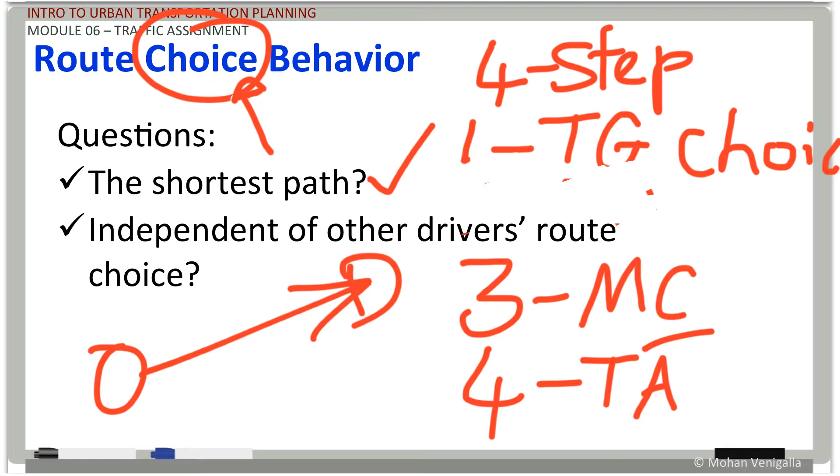So equilibrium assignment is the most used method these days in travel demand modeling software. All the methods you studied earlier were used at some point. Especially iterative assignment is still used, but not as much as even 15 years ago, thanks to advances in computing. It's not necessarily the software, it's mostly the processing speed that has increased, and therefore people can afford to adopt equilibrium assignment. We'll get to that later.

The premise of equilibrium assignment is that the network travel times, the link travel times, are going to be so adjusted by people choosing their own paths in such a way that the network will be in a state of equilibrium. What it means is that there is no incentive for people to switch their route.

Keep in mind there is a distinction between a link and a route. A route consists of a number of links. A link is one individual segment between two intersections. So a bunch of links make up a route. We are talking about switching a route, not just one link, an entire route from origin to destination. Keep that in mind. So when I use the word route in examples, treat it as something that can contain a number of links.

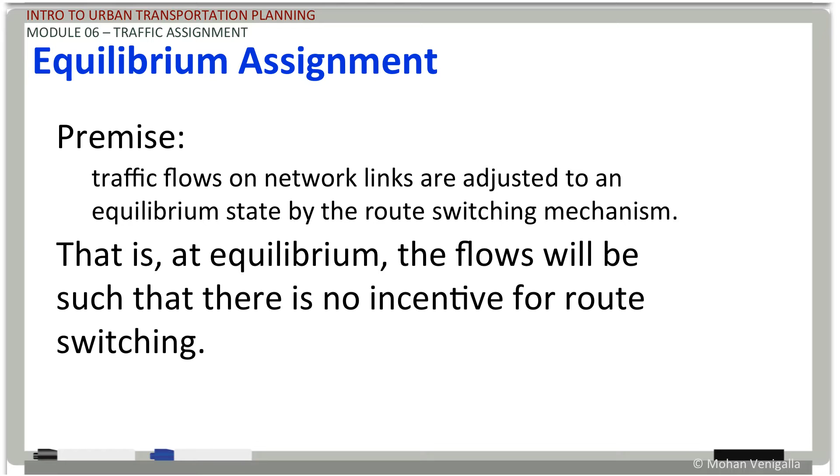So there are a couple of theories: one is user equilibrium and the other is system optimal. In user equilibrium, if there are multiple routes in play for a motorist going from origin O to destination D, let's say 3 routes, by switching from route 1 to 3 or 1 to 2, he's not going to improve the travel time. Improve is the operative word, meaning it will not be reduced. At best, it can be equal if you switch.

System optimal, on the other hand, is a formulation that seeks to minimize the total system travel time. In other words, I go from my home to George Mason and you go from your home to shopping. Regardless of purpose, our combined choices are going to affect the system such that the total travel, the number of vehicle trips times the number of miles traveled by all of us, is going to be an absolute minimum. It's a theory.

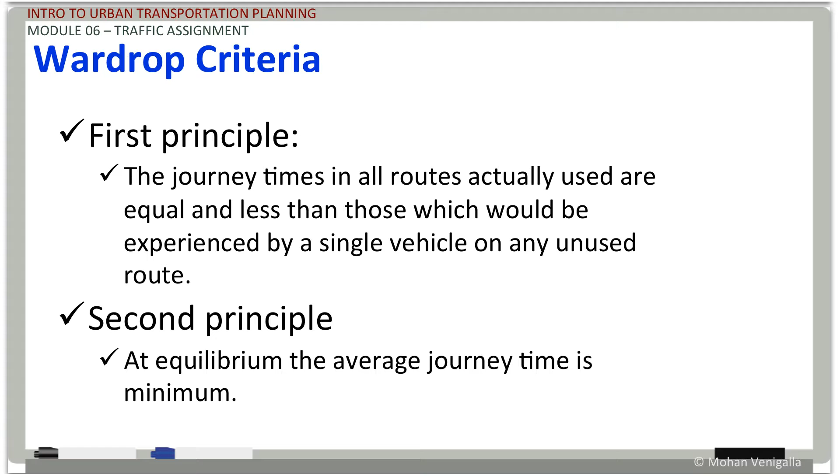That brings us to Wardrop criteria. This Wardrop criteria is very famous.

These criteria lead to the development of the user equilibrium assignment method. The first principle says that journey times in all routes...

I probably keep using that interchangeably. They actually, if they are in play, that means if they are being used, the travel time on the ones that are used is going to be equal to or less than the ones that are not being used. So the keyword is used versus unused. Keep that in mind.

The second principle states: at equilibrium, the average journey time is the minimum. So the average journey time of all travelers is minimized. These two principles form the basis for equilibrium assignment.

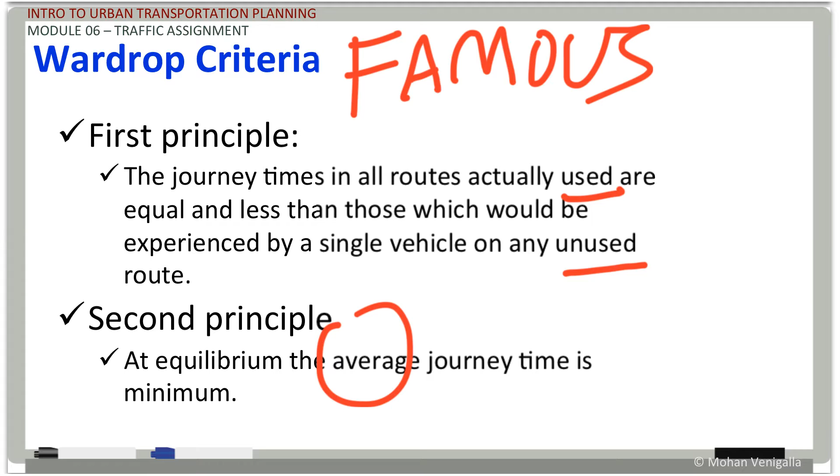As I mentioned just a little while ago, there are two methods of equilibrium assignment. First is the user equilibrium and second is the system optimal. Let's talk about user equilibrium. This is based on the Wardrop criteria, which we just talked about.

The two main assumptions in play here are: travelers are going to make travel decisions between any given OD pair entirely based on travel time. And the travelers a priori, meaning ahead of time, know exactly what is going to be the travel time between point A and point B.

Considering this method was developed decades ago, that assumption is a stretch. In today's world, you can probably envision a scenario where your travel time is chalked out because of lots of trip planning services available to you, like Waze or even Google Navigation. They give you approximate travel time. But consider this some 30 years ago - it was not possible to have prior information about travel time between any two sets of points.

So essentially this all comes down to this: if two routes are used, their travel time is going to be equal. If there are 3 routes, 2 of them are used and 1 is not used, the unused one will have either equal travel time to the ones that are used, or more.

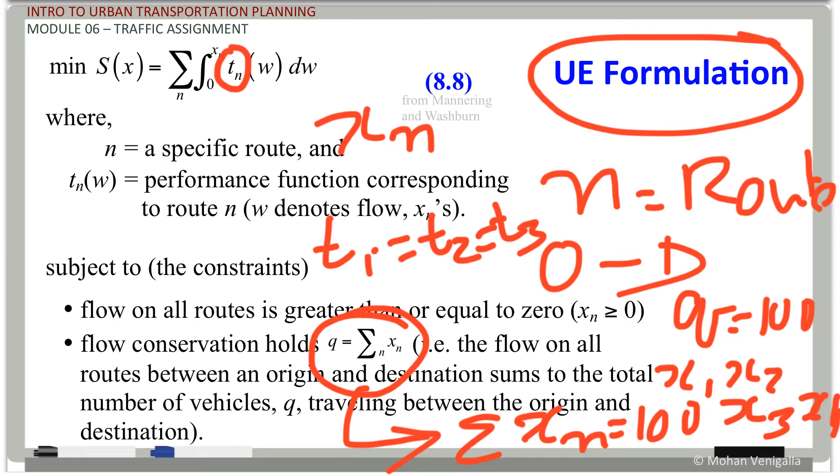In that particular state, if all 4 routes are used, the travel times t1, t2, t3, and t4 are going to be equal. That is this mathematical formulation. So if you look at - let me pause here a second.

So let's take a look at this mathematical formulation for a second. It looks very intimidating - it actually is - but when you really take a closer look at it, it's not that intimidating at all. What you have here is a travel time function. Remember what we have, the BPR function?

The BPR function is nothing but a travel time function of T sub 0 and the volume capacity ratio, right? So essentially, for each link you have a volume capacity ratio, a travel time relating to that volume capacity ratio. If you integrate between 0 volume and the maximum volume that link can take, which is what this term states...

Then you sum it all up among all the routes, across all the individual link segments in the route - all the links that are used in any route. There are several different ways of putting it. Then you have this, subject to the condition that the total flow between O and D is going to be equal to the total number of trips - if it is 100, then sigma of all the routes that are used is going to be 100.

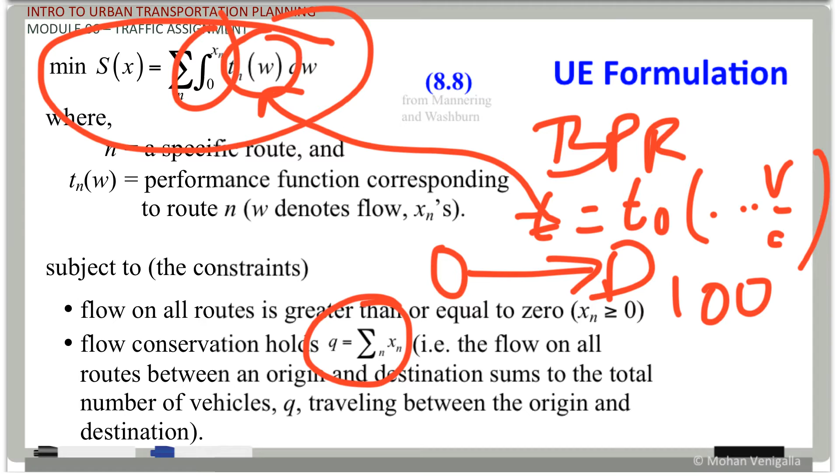So let's take a look at this formulation in the context of a 2-link network. You have your O and your D, and route 1, route 2, or link 1, link 2. Sometimes I may use these interchangeably, but route is the best way to keep in mind. A route may consist of a set of links.

If your travel time function for route 1 is T, whatever is in play at any given time, you have the volume, and this is going to be your T. So that is the function given. If you integrate it from 0 volume to V1, you are integrating between these two, getting this area.

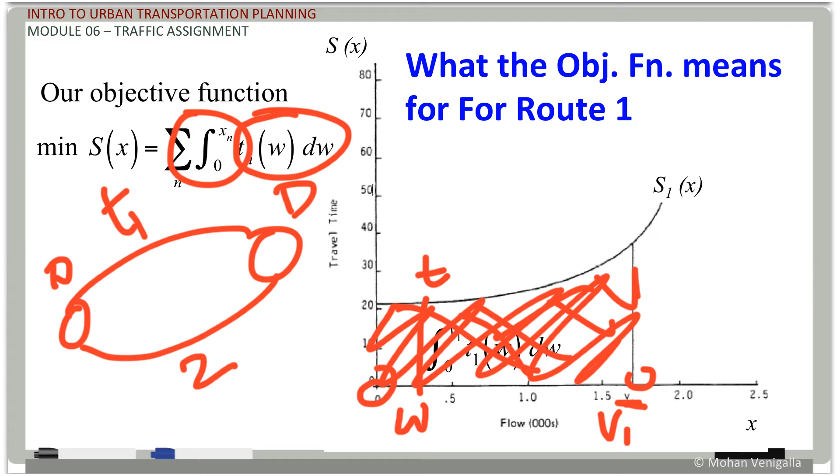That's what this formulation is talking about. You'll have a similar thing for link 2, and when you add them all up, that sum is going to be minimized in this mathematical notation.

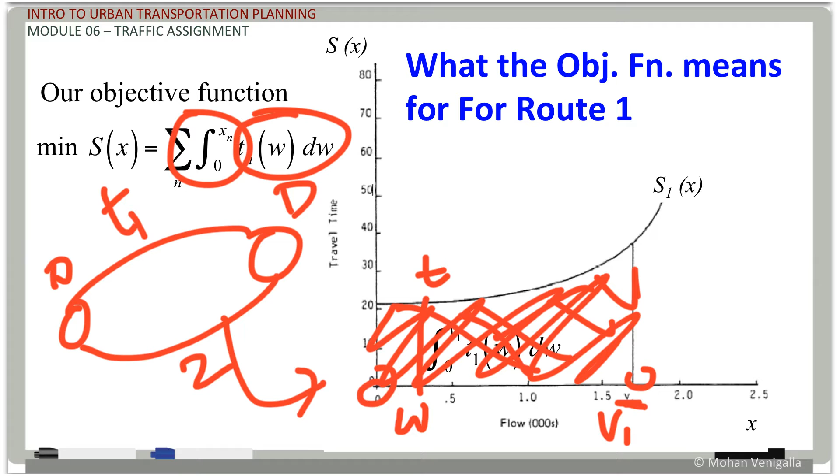So the best way to illustrate is to talk about a problem. Here is a problem taken from Mannering and Washburn, in your CEIE 360 book, chapter 8 — forgot the actual problem number. This problem states it's a two route network, route 1 and route 2. You have two routes, 4500 vehicles going from point A to point B, from origin to destination.

Route 1 has 60 miles per hour speed and is 6 miles long. Route 2 has a speed of 45 miles per hour and is 3 miles long. On route 1, for every 500 vehicles added, the travel time is increased by 2 minutes. On route 2, the travel time is increased by the square of the number of vehicles. We are required to find the equilibrium travel times.

So pause it here and read the problem again, and it will be much clearer when we are solving it if you understand the problem first. First and foremost, we need to find out what the travel time function is — this is basically the link performance function. It is verbalized to us, but we need to put it in mathematical notation.

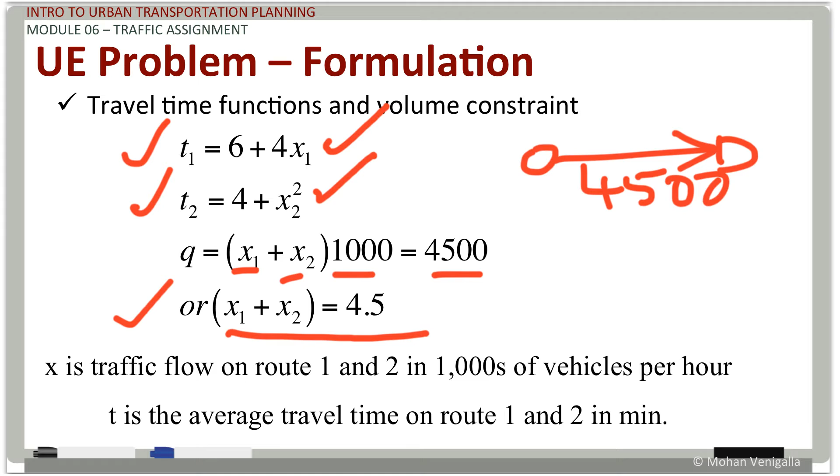First and foremost, we want to find out: will both routes be used or not? Well, you can clearly say they will be used. Just an intuition tells you that they will be used, but there is a mechanism to find out.

What if we put all 4,500 vehicles on one route and calculate the travel time? Let's put x1 equals 4,500 and x2 is 0. If x1 is the only one used, route 1 is the only one used, and route 2's travel time has to be higher than or equal to route 1's.

If you substitute like that, T1 will be 6 plus 4 times 4.5, so approximately 24. That's T1. In this case, while x2 is 0, T2 will be 4. So T2 is... T1 is greater than T2.

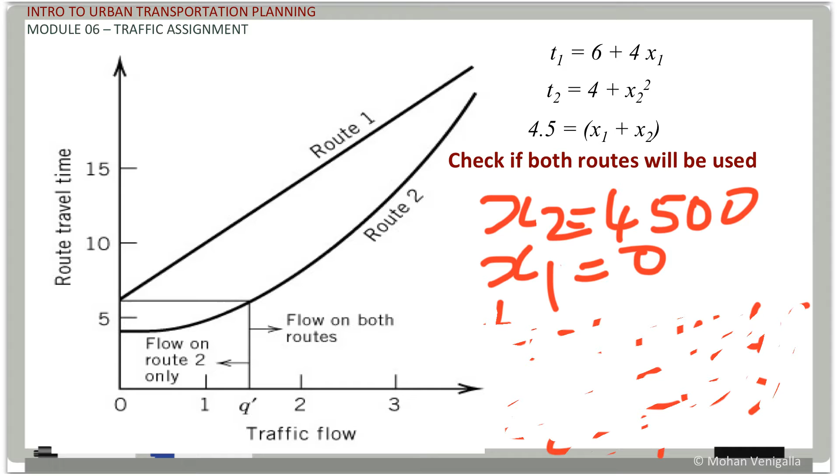Another way to check it is to put x2 as 4,500 and x1 as 0, and then solve this for T1 and T2 - you will get a similar answer. So there is no question, both routes are being used, and therefore the system has to be in equilibrium.

We have to solve for it. For a two-link problem like this, the simplest solution is a graphical solution. So what I did here is I put it in a spreadsheet. I put volume on x1, route 1 volume only, and then I computed the travel time on route 2 and travel time on route 1 based on x1.

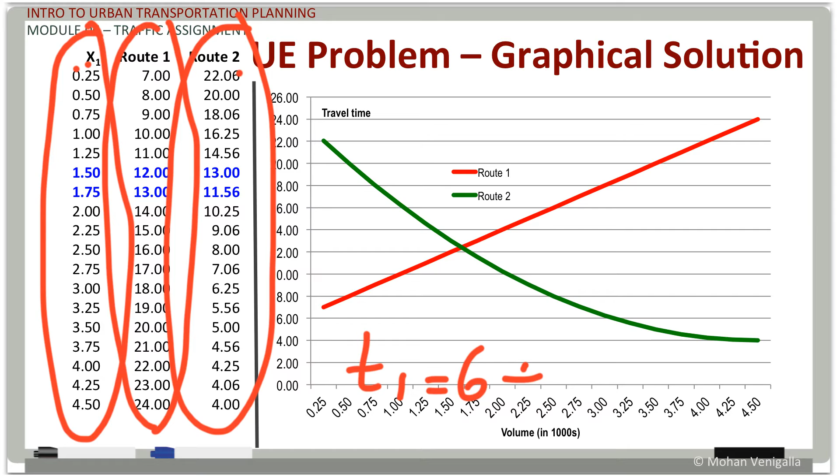So basically x2 will be 4.5 minus this value, and I substitute that into our T1. Remember, we had T1 equals 6 plus 4x1, and T2 equals 4 plus x2 squared. So x2 is nothing but 4.5 minus x1.

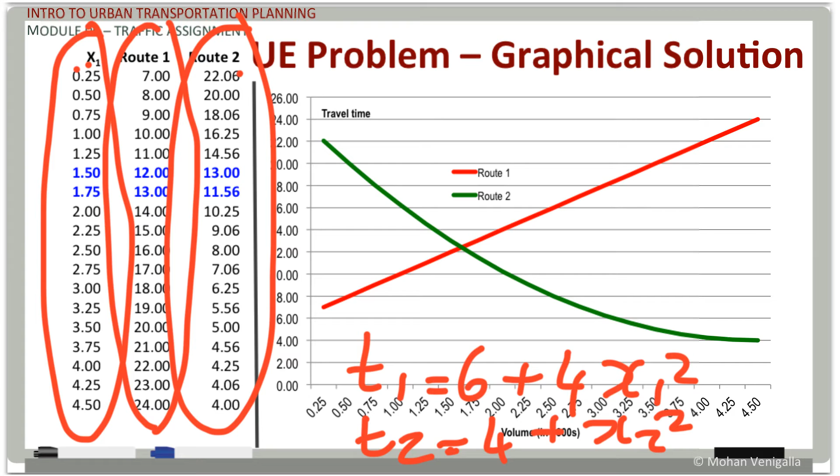Using that, I built this spreadsheet - let me erase this so you have a clear understanding again. Now look at the ones I highlighted in blue. As the travel time on route increases, travel time on route 2 is decreasing. There comes a point, somewhere between 1.5 and 1.75, where there is an inflection.

As it went from 12 to 13, this went from 13 to 11. So that is essentially where the equilibrium is struck.

So if you plot route 1 volume, which is this red here, and route 2 volume, with 4500 as your control volume - if you pay attention, I kind of reversed this. The curve, if you really plot it from left to right, should look something like this, but I reversed it. Let me make it less shabby and less crowded so you will understand.

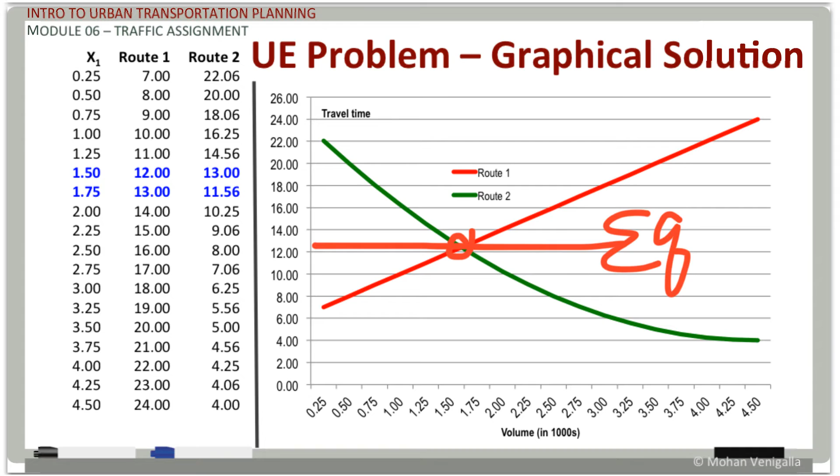Now take a look, pay attention to the chart itself. When these two curves meet, that means the travel times are equal. Approximately between 12 and 13, that's where you have it. So this is the equilibrium state when travel times are equal.

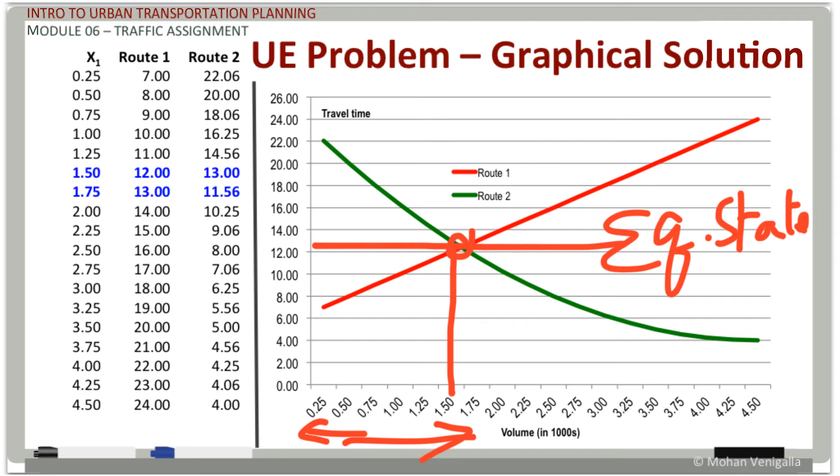From left to right, the magnitude is x1. From here to here the magnitude is x2 - I'm saying magnitude because you have to get 4.5 minus whatever the value is here. So this is your graphical solution. Fairly easy, right? Piece of cake.

Now it's even easier to solve it algebraically. We have travel time 1 on route 1 equals travel time 2 at equilibrium. Which means 6 plus 4x1 equals 4 plus x2 squared, and we also have this conservation of flow.

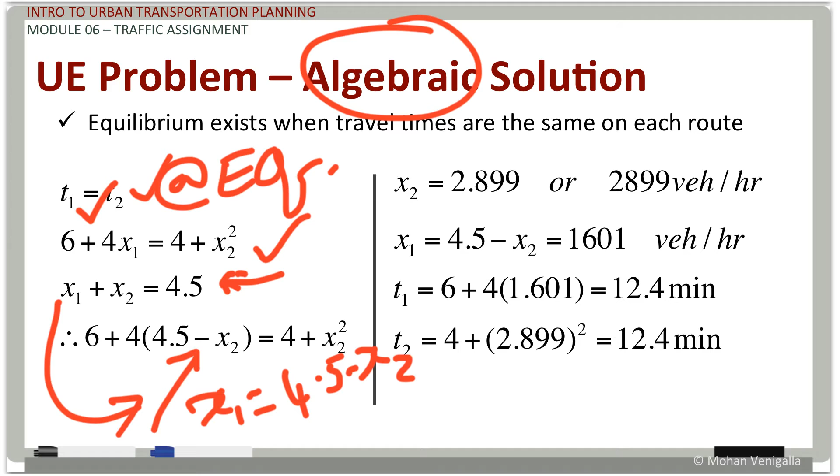So travel time is going to be equal on both routes. From this you can rewrite x1 in terms of x2: x1 equals 4.5 minus x2. That comes from this condition. If you substitute that value here, you have only x2 unknown, and solving for x2 you get 2.899.

Because we are talking in thousands of vehicles, x2 value is 2899. And x1 is basically 4.5 minus x2, or 4500 minus x2, you get 1601. And if you substitute these values into the T1 and T2 equations, you get exactly 12.4.

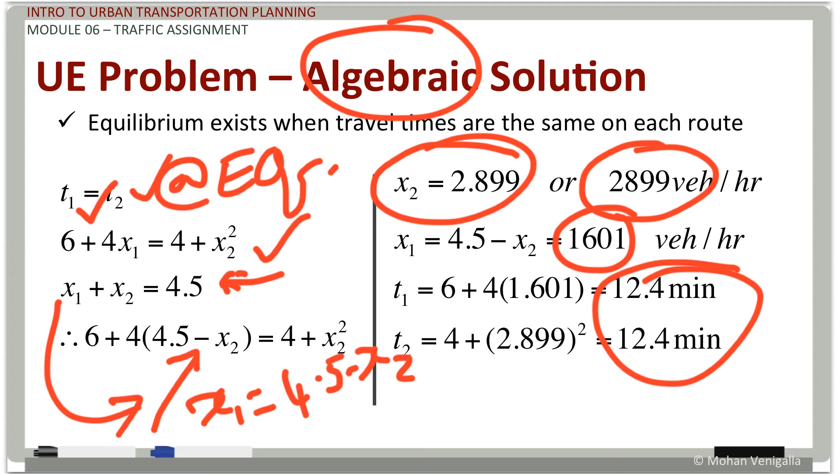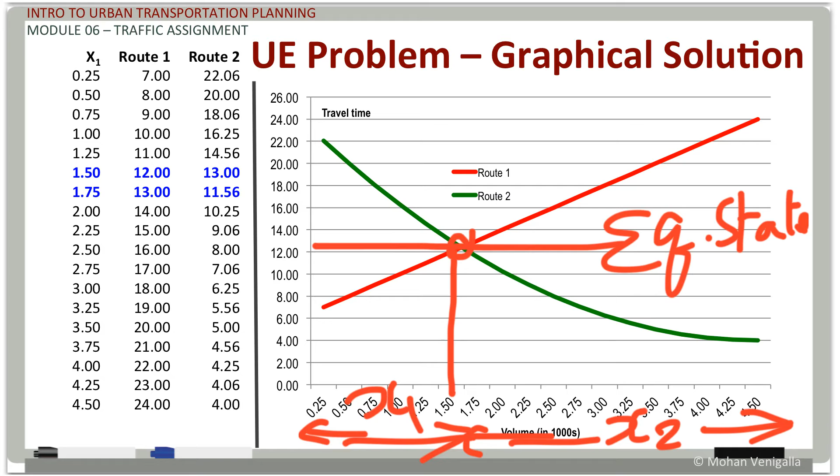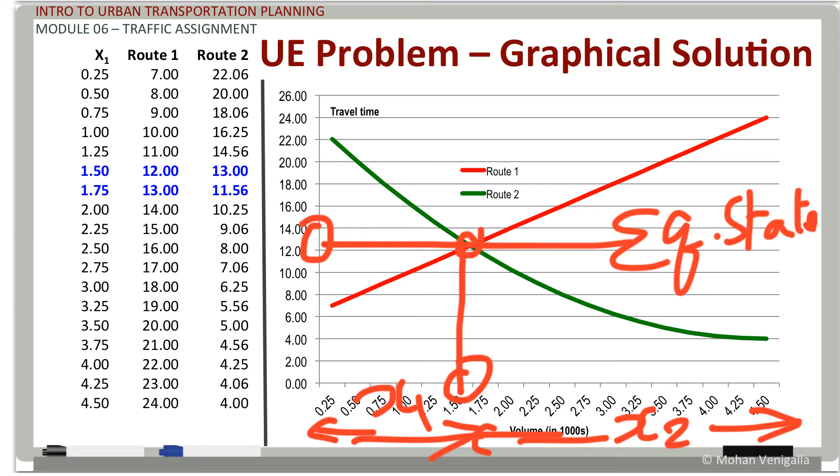So let's take another look at our graphical solution. By algebraically solving it, we got approximately 12.4. So that's where we are, around 12.4, and the volume we got on x1 is 1.601 or so. That's exactly where we are. So the graphical solution and your algebraic solution agree with each other.

So the third way to solve this problem is using mathematical programming techniques, using the same mathematical formulation we saw earlier. We formulated this as an objective function subject to certain constraints. The objective function is to minimize the sum of all the areas under the travel time function curve from 0 volume to the volume at which the system will be in equilibrium. In that state, the sum of all the routes, the links in the routes, that area under the curve is going to be the absolute minimum. That is the mathematical formulation, and that is what is based on Wardrop criteria.

To illustrate this with our two route two link problem, OD you have 1 and 2, and on route 1 you have the travel time function given by 6 plus 4W. We use W here because for integration, at any given point in time, the volume is indicated by W. For route 2, similarly. The integration is done between 0 and the volume on route 1, x1, and from 0 and the volume on route 2, x2. That's what we are integrating over, and that's what this objective function reduces to for this two route problem.

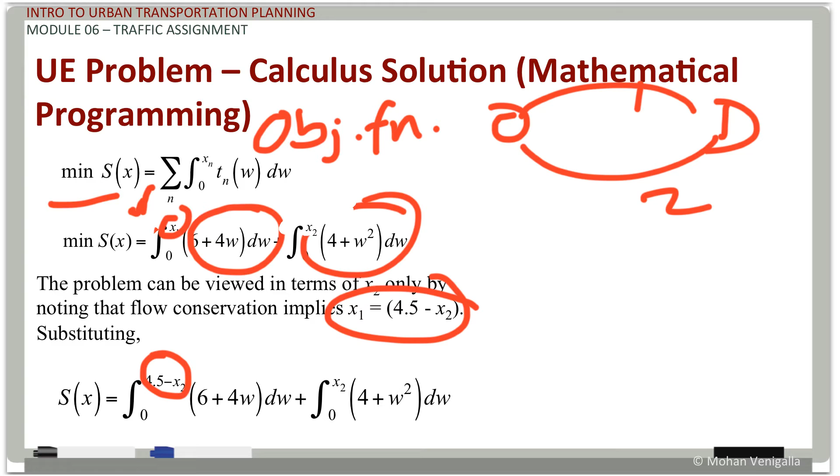Now we have the boundary condition, the conservation of flow, which is essentially x1 equals 4.5 minus x2. If you substitute 4.5 minus x2 for x1, the equation is written in this form. I blurred out the first three steps to follow up with the next steps, continuing from where we left off in the previous slide. We substituted x1 as 4.5 minus x2, and continuing with the integration, the equation takes this form.

Integration is continued, with the upper and lower boundaries being 4.5 minus x2 and 0. Here the lower boundary is 0, upper boundary is x2, and that equation further transforms into a third order equation in x2. Since this is a minimization case, d(sx) by d(x2) will be 0, which thankfully brings it down to a second order equation. You can use the quadratic formula to get the root and obtain the value of x2, which will be 2899 — essentially what we got using the algebraic formula.

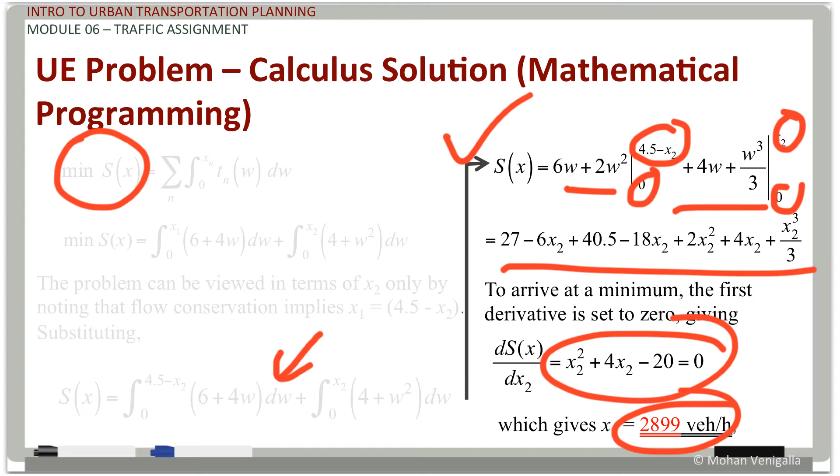The travel time function we used earlier was t1 equals 6 plus 4x1. That's not a typical travel time formula, but in the earlier iterative or incremental problems, we used a BPR function instead — that's the link performance function. This is a different example of similar nature, but the travel time is given as a BPR function. On route 1 you have 15 minutes, route 2 you have 20 minutes free flow travel time, volume on route 1 is V1, volume on route 2 is V2, capacities are 1000 and 3000, and total volume going from A to B is 8000. This is the problem, and we need to solve for user equilibrium.

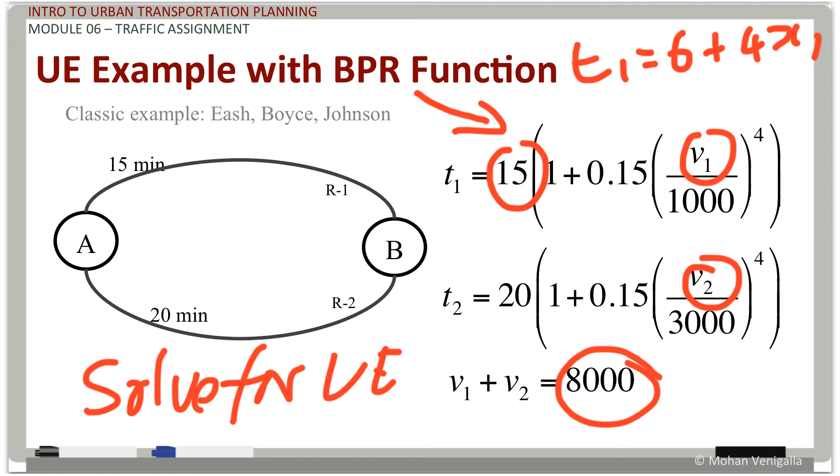So this is typically what we come across in a user equilibrium problem for traffic assignment. First let's look at the graphical solution. Same way, use the travel time function in a spreadsheet. Approximately, you can do that on a graph, engineer's graph paper, and you can come up with the same solution.

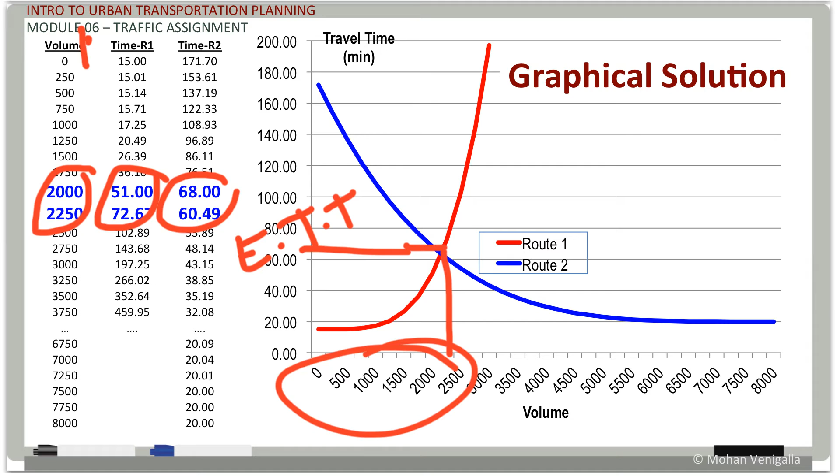When the volume changes — this should read volume on route 1 — from 2000 to 2250, you go from 51 to 72.67. Here is the inflection point somewhere there. So if you look at the chart, somewhere here is your equilibrium travel time, ETT, user equilibrium travel time. Reading from left to right, somewhere between 2000 and 3000 is where you have route 1 equilibrium travel flow, and 8000 minus that will be route 2 equilibrium travel flow. Graphical solution, again very straightforward, just like in the previous case — only difference is the shape of the travel time curves is different.

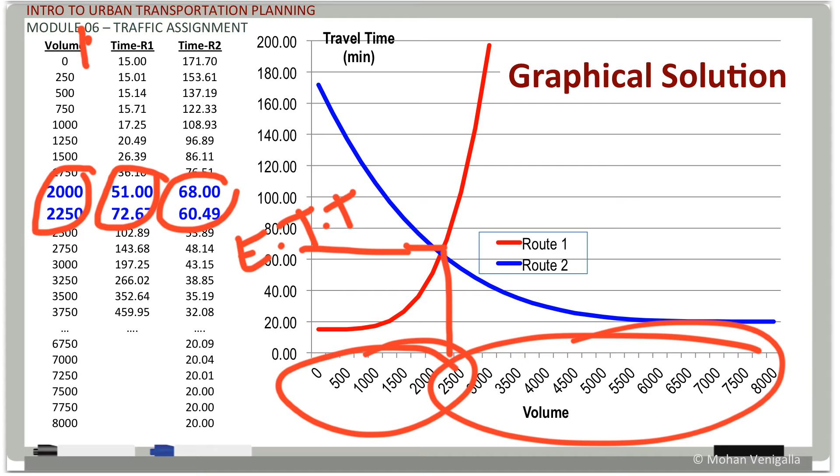Let us see how to solve this user equilibrium problem where travel time is a BPR function — in other words, it's a function of the volume capacity ratio to the order of 4. So we know at equilibrium, T1 equals T2. We are assuming both routes are in play, and they are.

Now, if you do the same check by putting all the volume on one route and then checking the travel times, you can still conclude that both routes are in play. So there's no point in doing that again.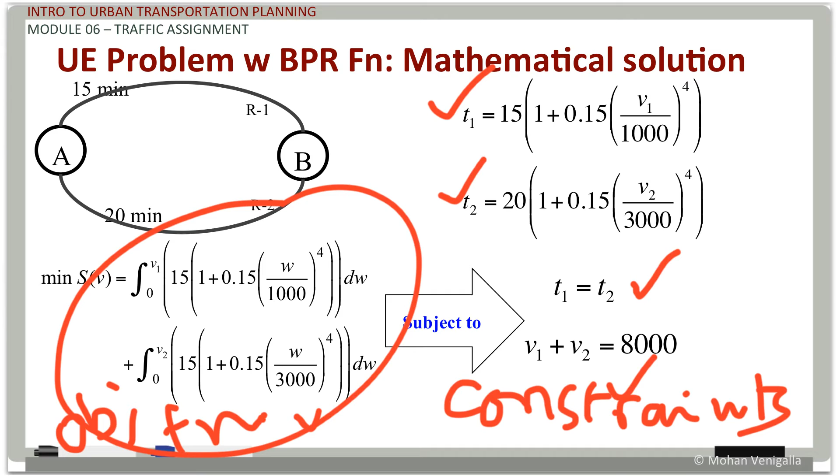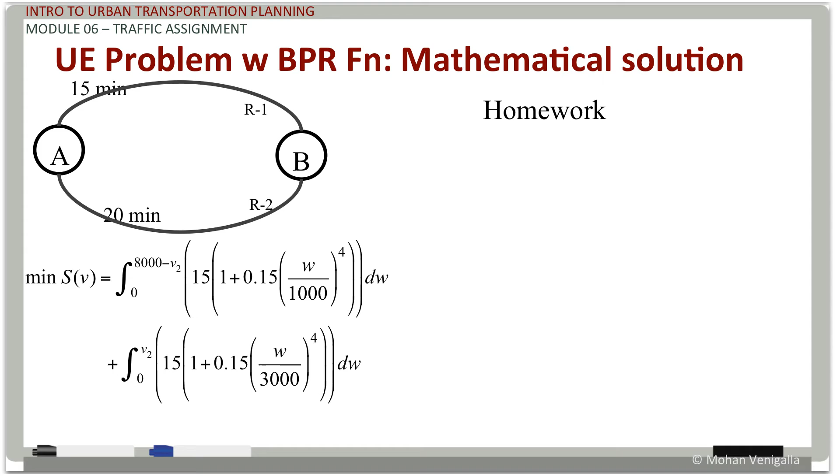Give it a shot in the homework and see if you can do it. This is a challenge homework. Probably I might come up with extra credit for this one. This will be a challenge homework. By the way, this is not easy to do, but it can be done.

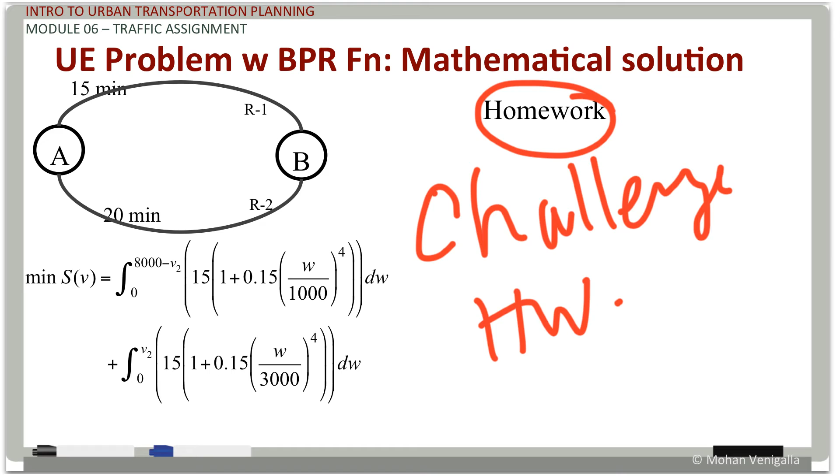You will get ultimately the same solution as we got in the algebraic way earlier. So net, whether you use the mathematical formulation, the algebraic solution, or the graphical solution, at the end of this, the solution of this problem is going to be something like this. We started with the free flow travel time on link 1 as 15 and on link 2 as 20 minutes. By putting 8,000 vehicles going from A to B on these two links, to reach the equilibrium travel time of 63 minutes on both links, you will have 2,153 vehicles on route 1, whereas 5,847 vehicles are coming on route 2. And that is the solution for this particular problem, which uses the travel time function, the BPR travel time function.

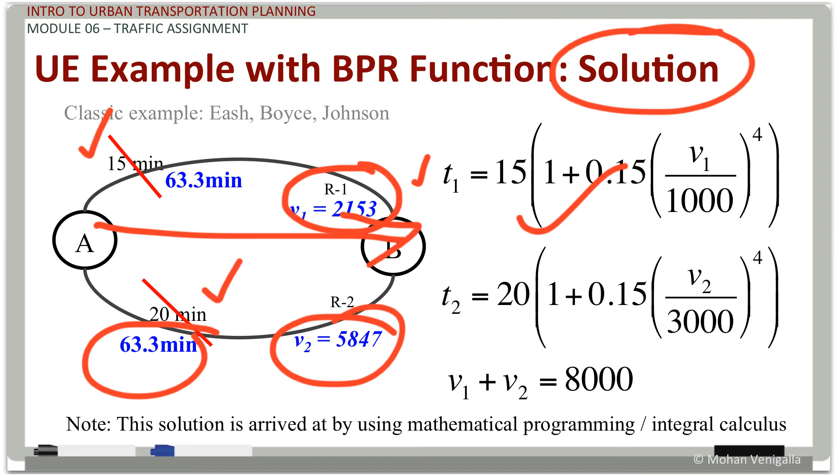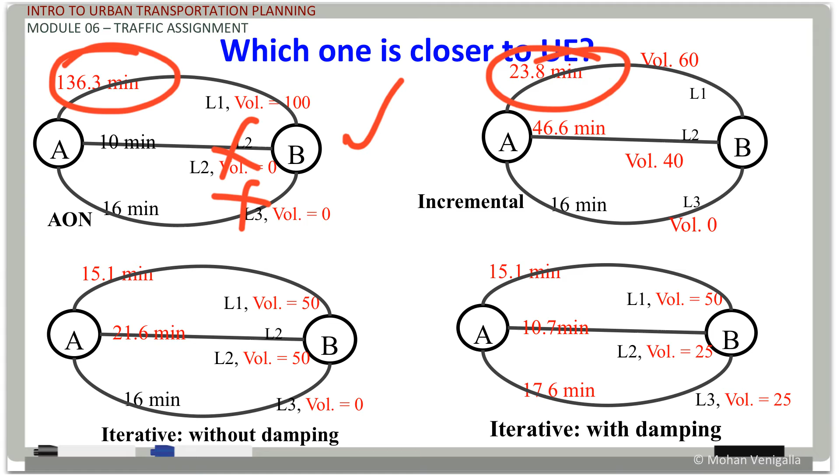Now let's revisit some of the problems we have solved earlier using different methods. The same problem actually we solved using different methods. All or nothing: put everybody on this link, and it said 136 minutes, and nothing here, nothing here. The incremental assignment used 23.8 here, 46.6 and 16. The travel times are not equal anywhere.

Now if you look at the iterative method without damping, you have 15, 21, 16. They're better than the earlier two, but still they're off. But look at the iterative method with damping. They're not as bad at all. 15.1 — if it is equilibrium, everybody has to be equal, but they're closer than the other three. So if there is anything that comes a little bit closer to your equilibrium solution, it's iterative with damping. That's why that method is still in use. So it's just a comparison of user equilibrium with other methods we have solved before.

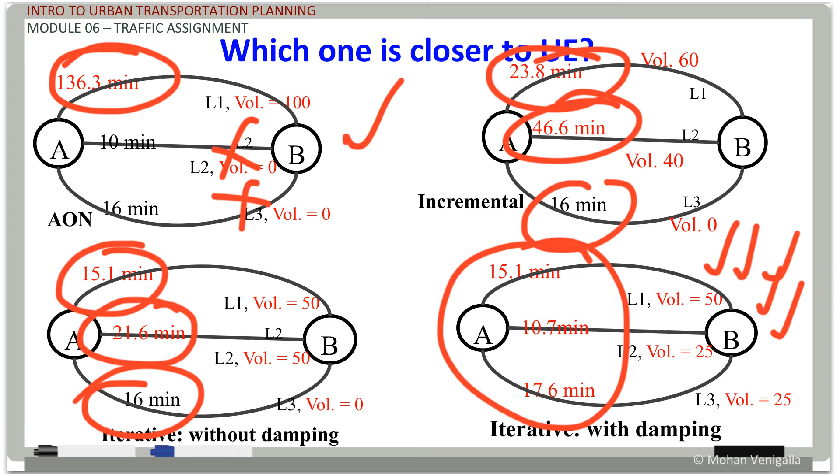Let's get tough on this right now. We add one more route to the problem. You have route 1 and route 2, which we solved earlier with some difficulty. Now there's a third route in play, and all three will be used, trust me.

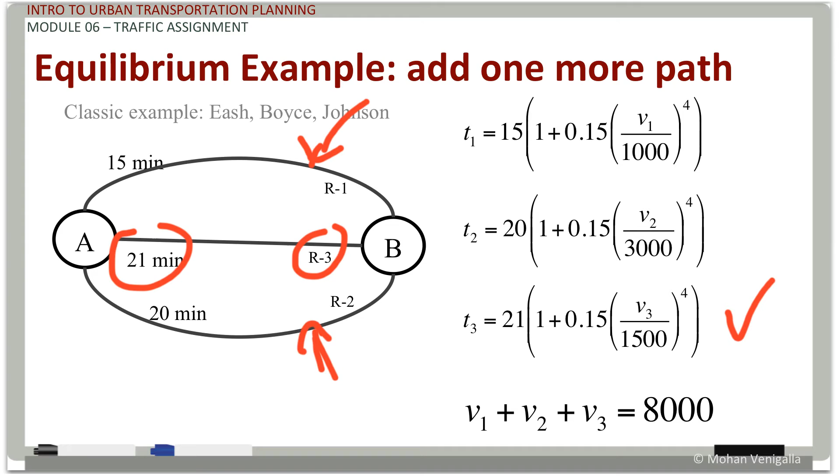The third route has a 21-minute free flow travel time, and the function is something like that. The capacity is 1500 for this. Now do the same equilibrium assignment on this network.

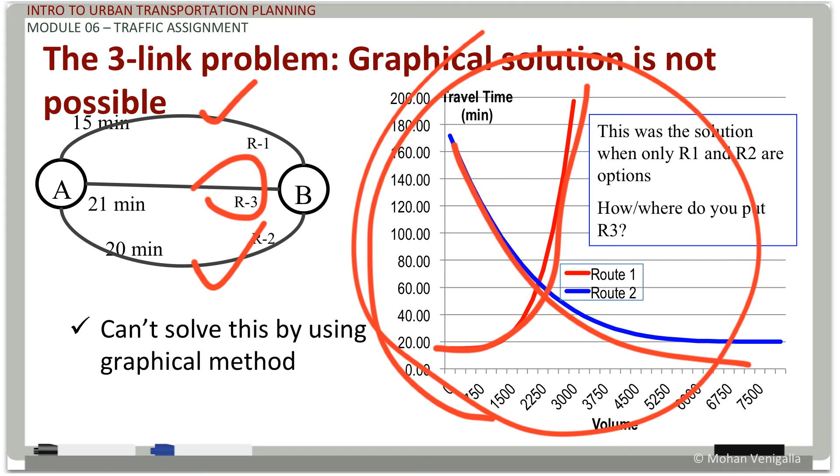Now let's look at the graphical solution. Can we do this? Route 1 we know we can plot the previous way, and route 2 we can plot that way. Where are you going to put route 3? How are you going to manipulate this chart to include it? It's not that easy, it's not possible. It is impossible to put that in a graphical solution. So the graphical solution for this case is out.

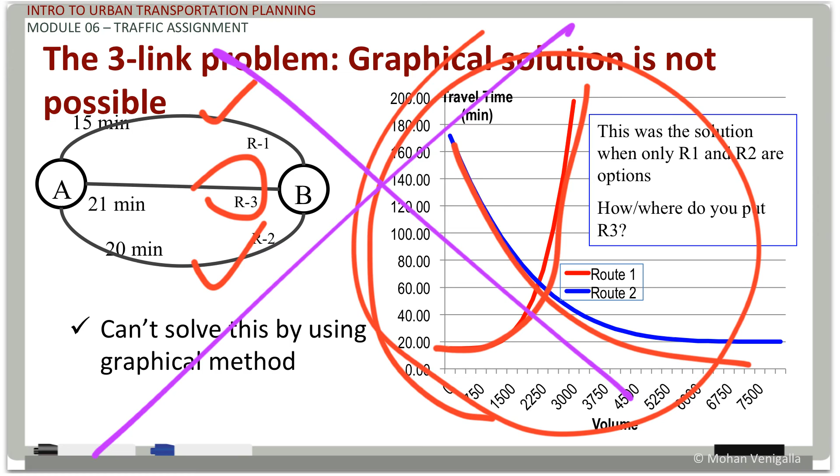Now let's look at the algebraic solution. Now you have T1, T2, T3. Well, they're all equal, so at least we give you that.

There are a total of 6 unknowns, and 1, 2, 3, 4, 5 equations. If you know the basics of simultaneous equations, number of unknowns minus 1, if you have that many equations, you can solve the problem. In this case, it's possible to solve it algebraically, but it's going to be a tremendous effort. We are not doing it, by the way. Breathe easy, we are not doing this.

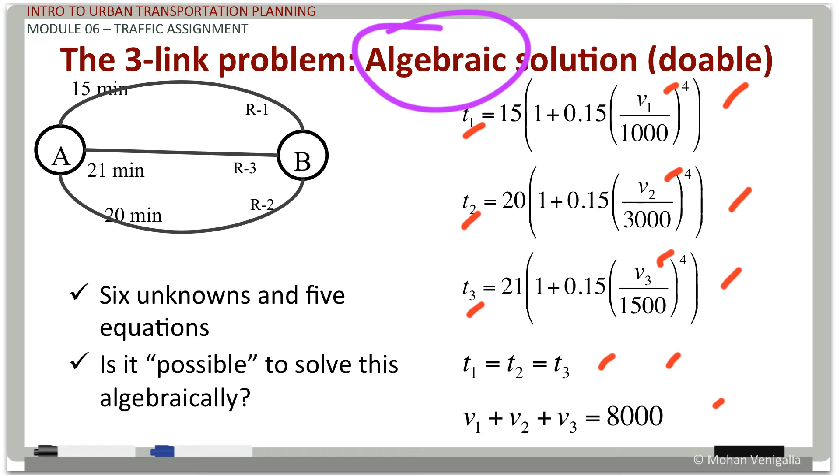Now, the mathematical solution. Just remember, we just added one more route with a travel time function, t3. And now your objective function has one more element added, subject to these conditions.

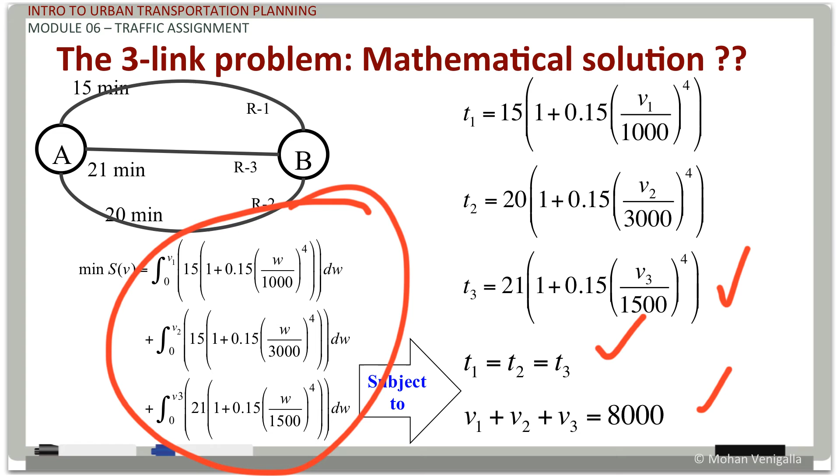What do we have to do now? Yes, it is complicated. Remember, it's only one more route added, and it is the simplest problem. If going from 2 to 3 routes makes the problem so complicated, imagine how complicated solving this would be for a network like the Washington DC metro area. So it's mind-boggling.

What would you feel like doing now? Yeah, give up is exactly what you would feel like doing, especially if you are given only a calculator and a piece of paper and a pen to solve this. Even a spreadsheet is not going to help you much. I'm talking about just a 3-route problem. Forget about the Washington area network problem.

So there is hope in this seemingly hopeless situation, and that comes in the form of Frank-Wolfe decomposition. It is a heuristic which I will just show you the logic of. It's in one of the papers I gave you, which you could have downloaded, written by Chatterjee and Venigalla.

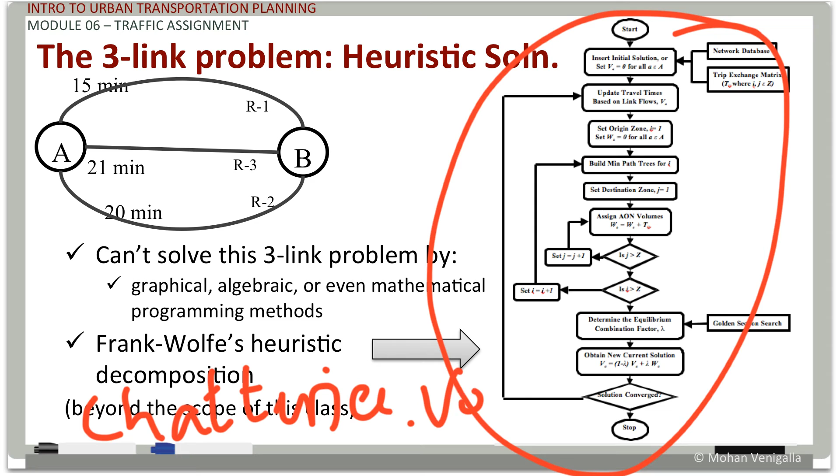It's a book chapter I wrote with Dr. Chatterjee, and in that there is this algorithm, which is an iterative algorithm, meaning there are a number of iterations. This is a feedback loop for iterations. We are not going to get into the details of this. This is actually a graduate level topic. We will cover this in a graduate level course, but not here.

Using this is called a heuristic, meaning it gives you an approximation for your mathematical formulation. Remember, the basis for this is the mathematical formulation: minimize sigma from 0 to x. Remember that objective function formulation? That objective function and those constraints are what go into this heuristic, and it marvelously decomposes on a step-by-step basis, giving you an absolute minimum and a unique solution for travel time, user equilibrium travel times. That is what this heuristic does. Luckily, we are not covering that in this class.

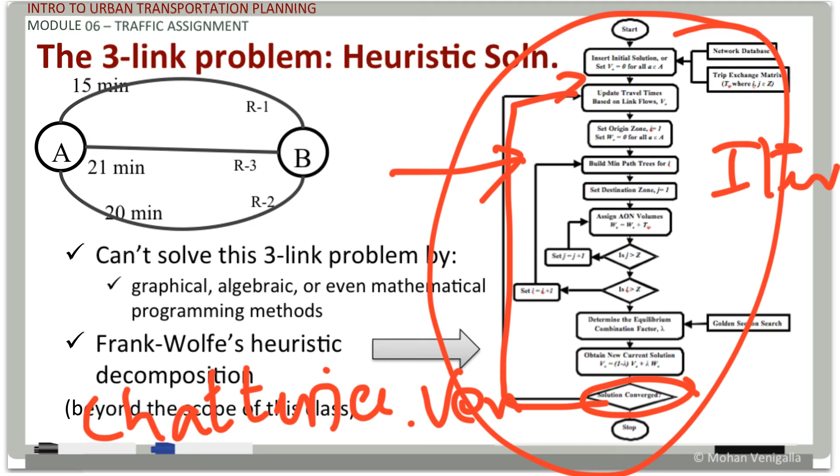So the second method is system optimal. The first one we talked about so far is user equilibrium. We spent so much time on it because that's the one used the most these days. System optimal will utilize various routes such that the overall vehicle travel time, meaning vehicle minutes, is minimized. That's number of vehicles times the amount of travel they do, so vehicle minutes. It's basically the area under the curve.

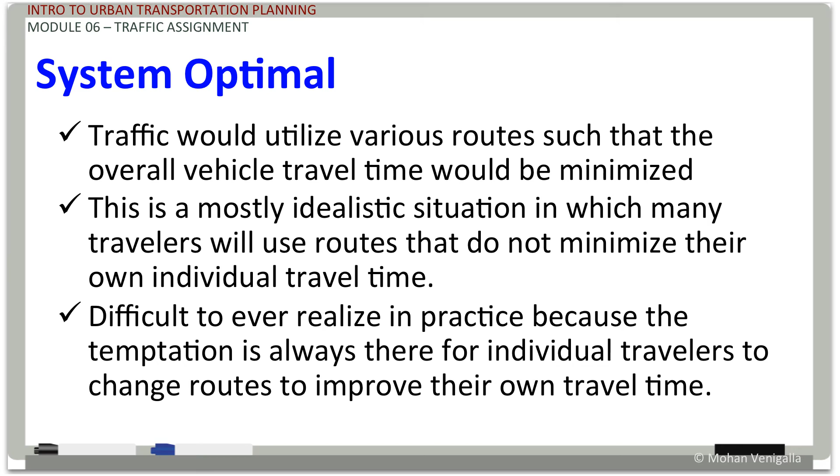This is mostly an idealistic situation, idealistic like utopia. It's basically saying you and I travel from point A to point B, totally independent of each other, in such a way that the entire system's travel time will be minimized. That seems like a stretch, even though there is a theoretical proof and it is solvable using computers, but it is not practical. It is difficult to ever realize in practice, so it's not practical.

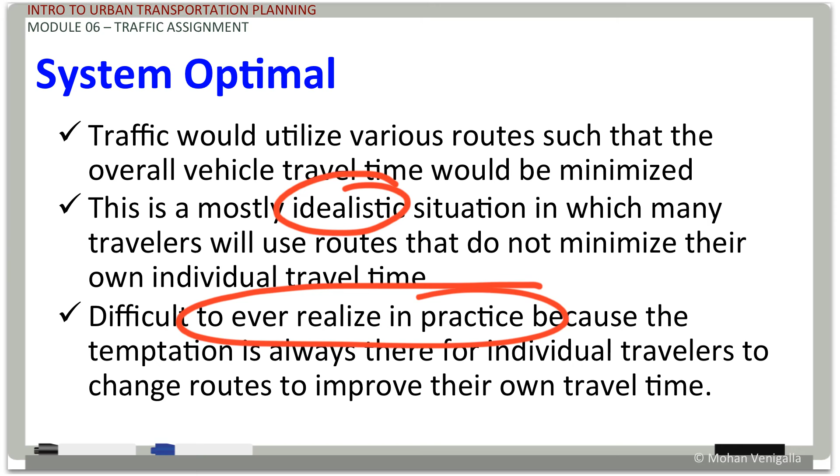But still, the scholars that we are, we will learn a little bit here. I may not have taught this in class, I might have skipped this for you to go through on your own. So pay attention to this in the video.

So this is the system optimal formulation, and it's less intimidating than the user equilibrium formulation. If you have the travel time curve, in the system optimal state its travel time for link 1 is T1 and its volume is x1, and the product of these two is what you're getting. You are minimizing the sum of that total travel time, vehicle minutes of travel time.

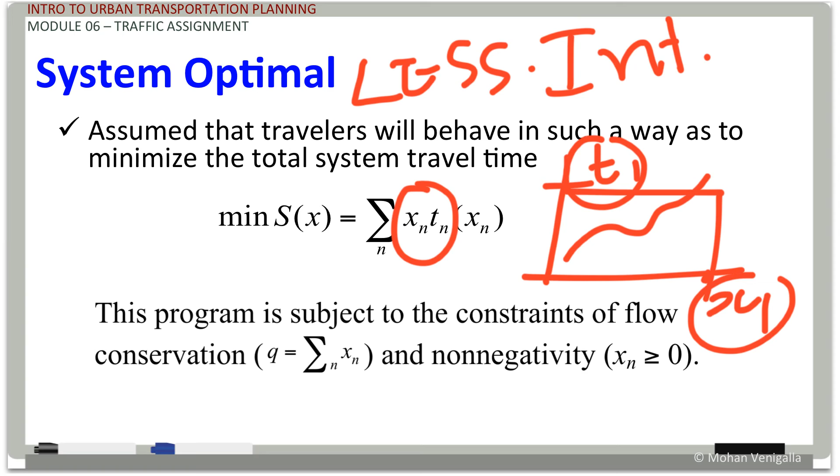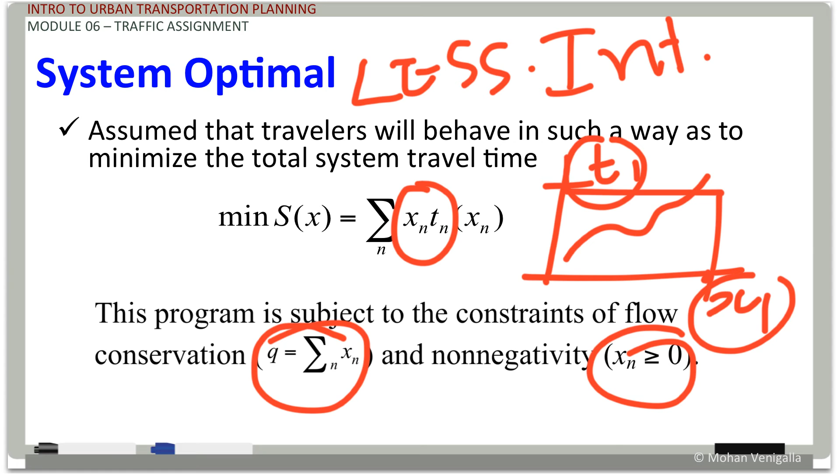Subject to the condition that conservation of flow, total flow between origin and destination pair is going to be equal, and the flow has to be positive, 0 or positive. That means there should not be any negative flows at all.

Very simple. The objective function of the two links is volume multiplied by travel time of route 1, volume multiplied by travel time of route 2. So that will reduce to, in x1 and x2 terms, 6x1 plus 4x1 square plus 4x2 plus x2 cube.

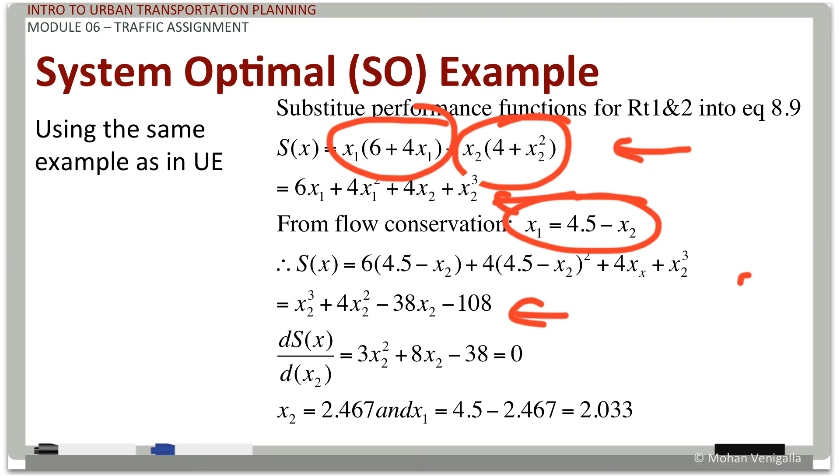We also know from conservation of flow, x1 equals 4.5 minus x2. Substituting and reducing, you have everything in x2, third order in x2. By differentiating with respect to x2 and equating it to 0, which is system optimal - that is the minimum - you will get x2 value and x1 value as 2.467 and 2.033.

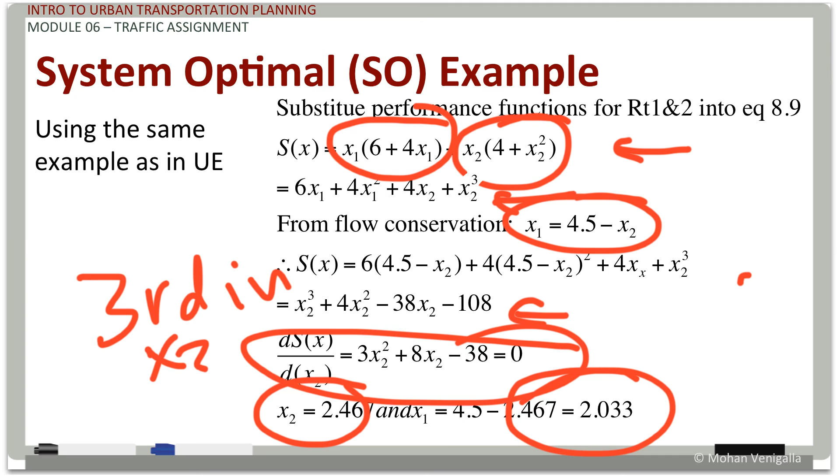So if you plot this system optimal solution, it will look like this. Remember, pay attention: I am not plotting this as conservation of flow like earlier at 4.5 in the user equilibrium solution. No, I'm not doing that here. Also earlier I plotted route 2 from the other side, I'm not doing that right now either. Rather, I am plotting everything from left to right. So this is route 1, this is route 2.

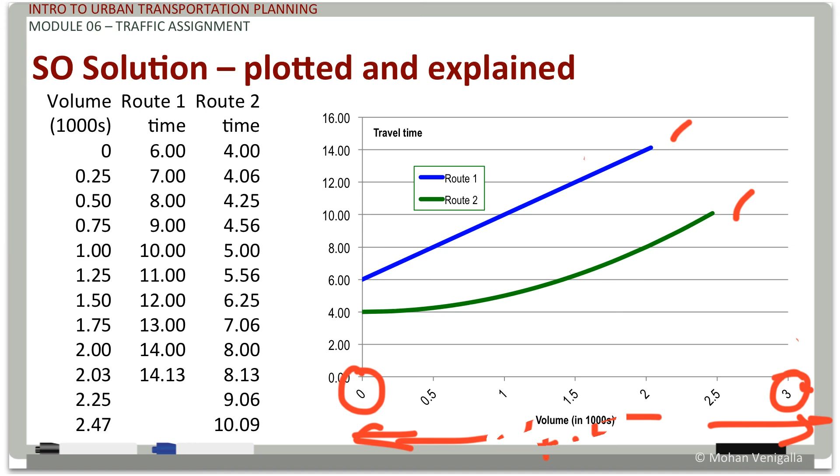Now, what does system optimal mean? System optimal means basically volume multiplied by the travel time. Let me draw a color so there won't be any confusion. For link 1, that is T1 times x1 - this rectangular area, that's T1 times x1.

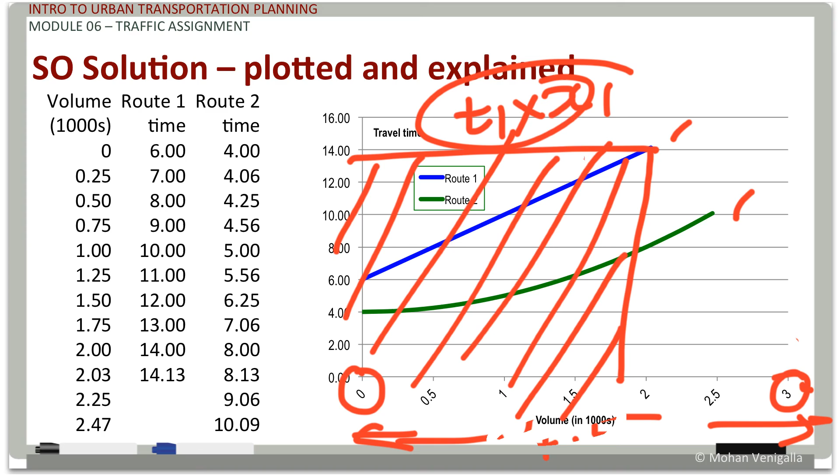Let me draw this for link 2 in a different color. So this purple here is T2 times x2. These two sum is the absolute minimum possible. So that is the solution you got using that mathematical formulation.

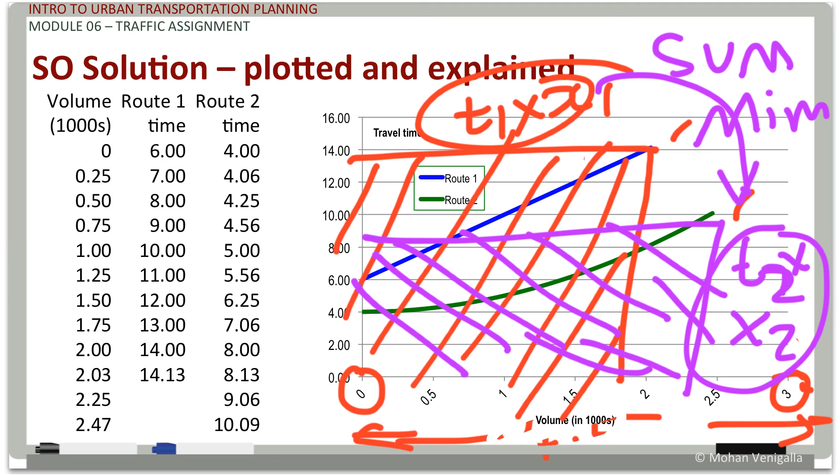This is not a graphical solution, it's plotted and explained - the solution we got, I'm plotting and explaining. Don't confuse this as your mathematical, graphical solution, not at all. So I hope you understand the sum of these two rectangles is what we have. Okay, pay no attention to this box here, I annotated something incorrectly there. Just don't pay any attention to it.

So the system optimal problem is basically, how does it differ? How does this system optimal solution differ from the user equilibrium solution? If your total travel time in the system, how you compute it is x1, the volume on link 1, times travel time on 1, plus x2 times t2.

That is your total travel time in the system. You can compute the same value for user equilibrium as well as system optimal. If you compute that for user equilibrium, which we solved earlier, the user equilibrium travel time is 12.4 on both routes, and there are 4,500 vehicles. It doesn't matter which route they took because the travel time on both routes is 12.4. So when you convert that into vehicle hours, that comes to 930 vehicle hours.

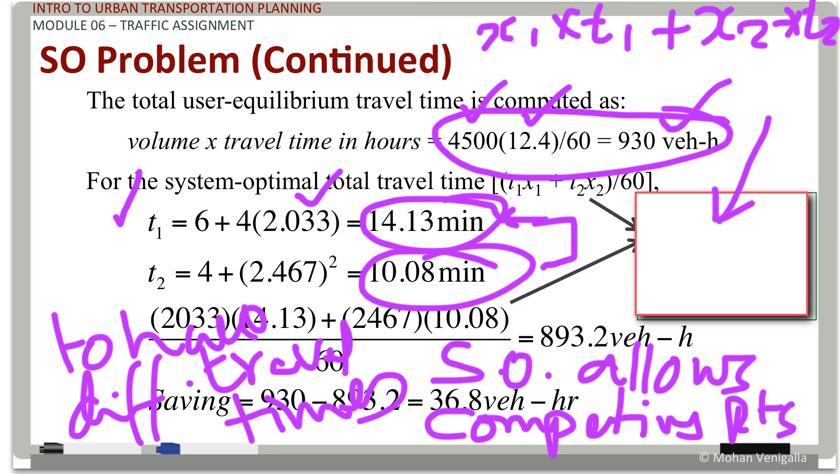Okay, now continue with this. I just cleaned up the slate here. So earlier we had...

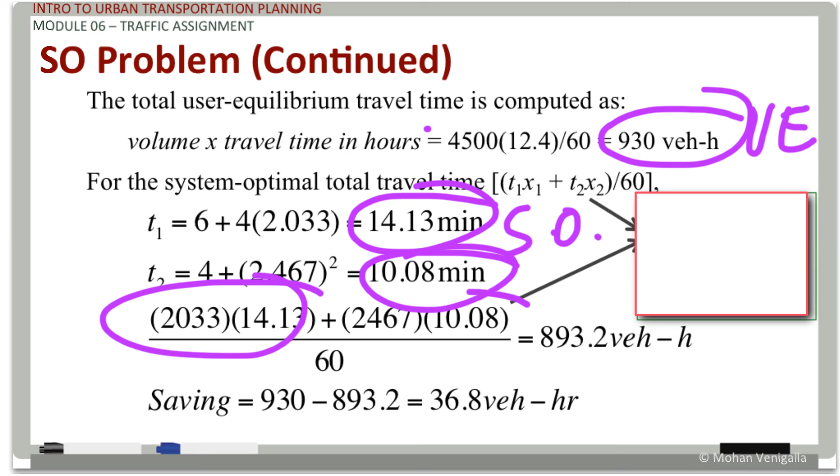The system time is 930 vehicle hours in user equilibrium, and we computed travel time on route 1 to be 14 minutes, 10 minutes on route 2 for the system optimal solution. Using the same formula, the system-wide vehicle hours traveled in the system optimal case is 893.

The system optimal, the very basic formulation, is that this is going to be the absolute minimum. You cannot have anything less than that in the system. In the user equilibrium case, you had 930 minus 893, and that is a difference of 36.8 vehicle hours.

Remember, in user equilibrium, users are maximizing their benefit, or you can also say users are minimizing their travel. In system optimal, users are being altruistic and they're trying to reduce or minimize the system-wide travel time. That is why if this utopia can be achieved, you will have less fuel consumption, less emissions, etc. It ain't going to happen. But that is the theory.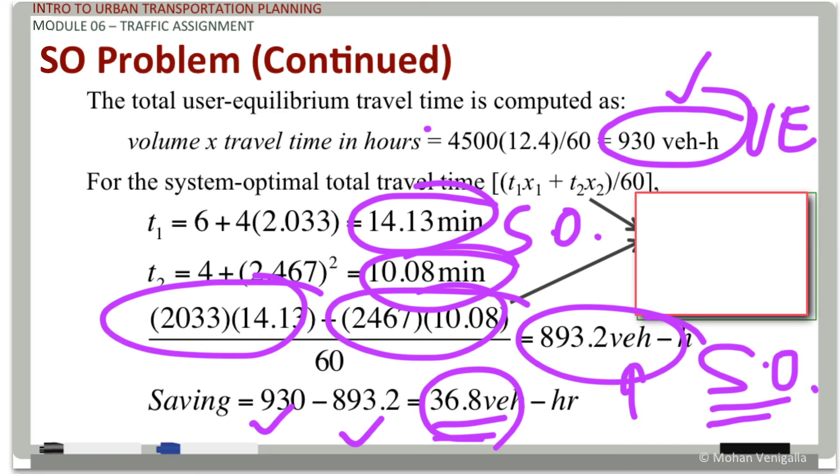So let us summarize. The equilibrium method, whether it is system optimal or user equilibrium, both are theoretically sound. User equilibrium makes practical sense, but system optimal doesn't make any practical sense. And user equilibrium is the most used, so therefore, even if you don't understand the Frank-Wolfe decomposition, which is the one that every computer program does, including your QRS2...

But you just understand the complexity of the problem. That's all the purpose of this video is, to understand or have an appreciation for the complexity of the problem.

So let's do a module summary. In module 6, we started with explaining the I/O for traffic assignment, input output. So the first one that comes into it is the zone-to-zone vehicle trip exchange matrix by time period. Same thing, time period specific network input, and you get time period specific loaded network as your output. So that's what we went over.

Then we went over a pathfinding algorithm, which is essential no matter which method, including user equilibrium, you need a pathfinding algorithm. So you need to understand a methodical way of finding paths, which is what we learned. We call that the label correcting algorithm.

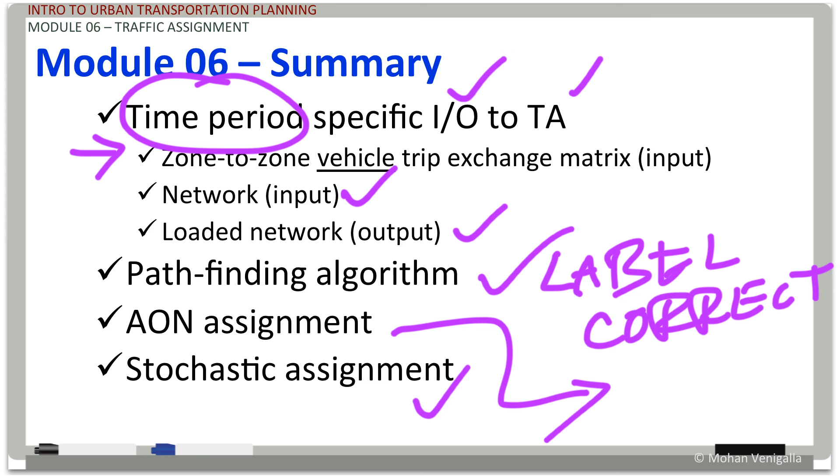And then we went over capacity restraint. As the volume increases, travel time increases by some function, and we introduced the BPR function. And then we called it the link performance function, various names for that one.

And using that capacity restraint, we talked about the iterative method, the incremental method. Incremental method, we used 40%, 30%, 20%, and 10% in 4 iterations we assigned, each time updating the travel times on the links. And then we went over the iterative method without damping first, and then with damping.

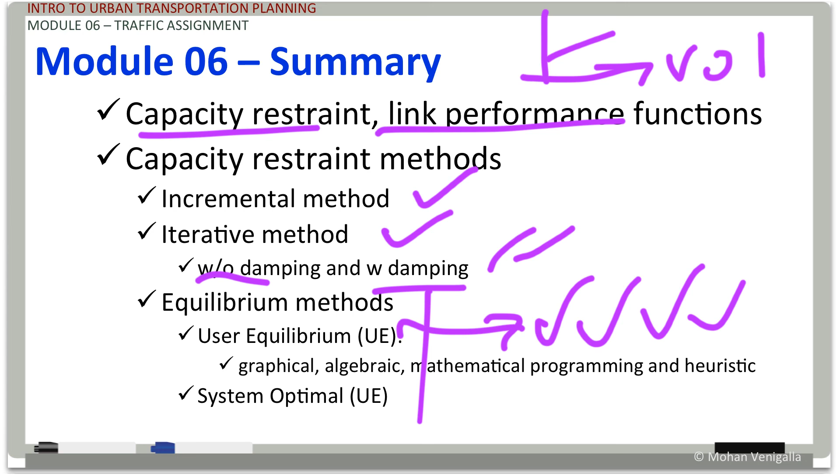And then we went over 2 equilibrium methods, the user equilibrium method and the system optimal method. This being the winner as of today. User equilibrium is used everywhere, or in most planning applications in the 4-step planning process.

That pretty much concludes module 6, but I want to give you a little heads up on transit assignment. So the links of transit assignment, they are not necessarily what you call intersection links. They are different services running between stops and stations. So if you have a bus stop here and the next one is after several intersections, that will be one link. Between bus stops is one link. So just a conceptual difference.

Again, I said it involves person trips, not vehicle trips. In highway assignment, it's vehicle trips. So it involves passengers, aka person trips. It's complex interchange patterns associated with passengers. In other words, you have walk, transfer, etc. Those are the interchange patterns that are taken into consideration.

So impedance function is not just travel time. It uses a combination of travel, wait, and all kinds of timings, in-vehicle, out-of-vehicle, etc. And then the fare structure is important. All you got to look at is the utility function in mode choice modeling. So that forms a basis for impedance in transit network assignment.

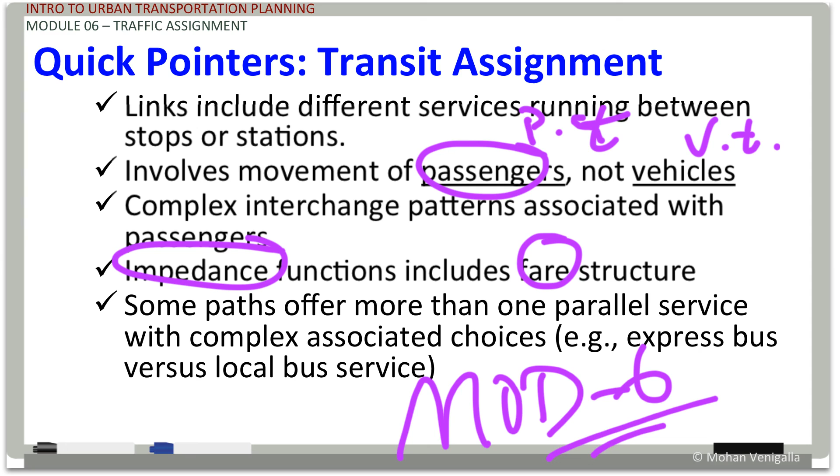And I think with that we conclude module 6. I hope you learned something in this module. Thanks for watching.